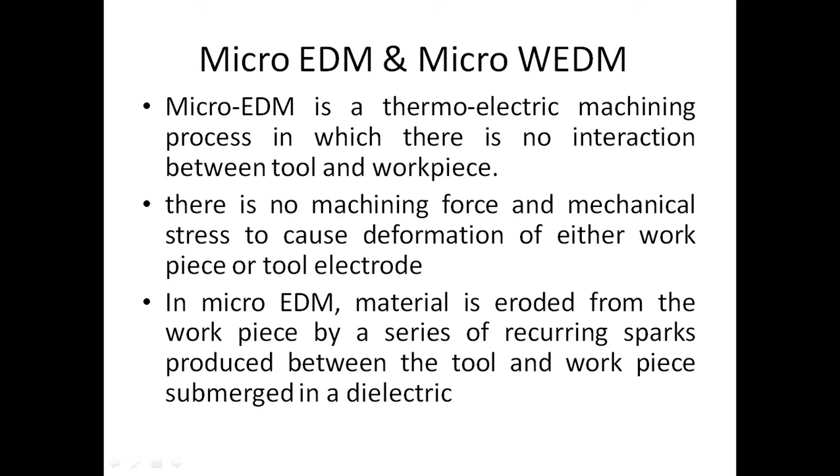It can machine any electrically conductive material regardless of its hardness and strength. Due to lower voltage and current used for a few micro or nanoseconds, the material removed for each pulse duration is in the range of micrograms. Advantages of micro-EDM systems are low tooling cost, high aspect ratio, improved precision, and considerable design freedom.

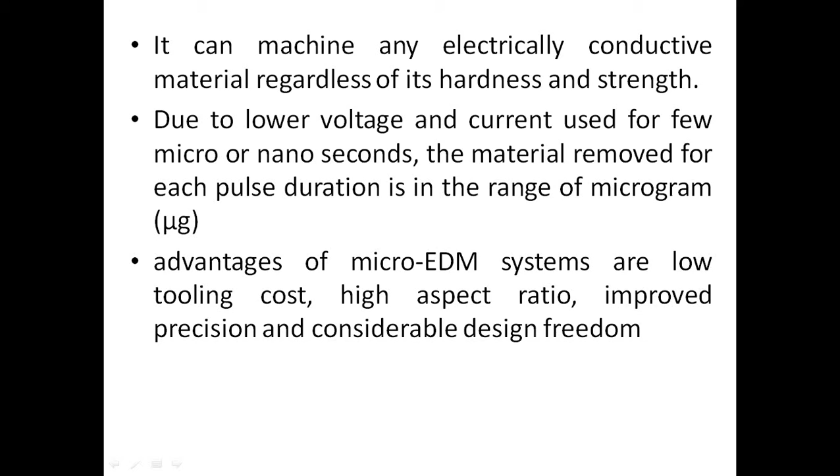Principle of material removal mechanism in micro-EDM. Parameters such as assigned and controlled inter-electrode gap, voltage, energy per pulse, and frequency of spark discharge. The high geometrical accuracy and good surface quality, roughness of about 0.1 micron, is achieved at high frequencies greater than 200 Hz and small discharge energies for each spark discharge in the range of voltage of 40 to 100 V.

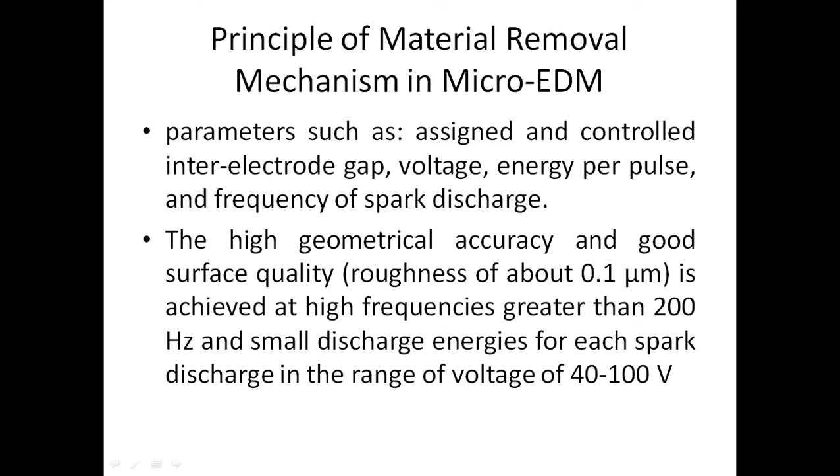The discharge energy is supplied by a pulse generator, and a servo system maintains the constant spark gap by moving the tool electrode at a suitable rate. Fresh dielectric is supplied into the spark gap by a dielectric circulation unit. The dielectric circulation unit consists of a pump, filter, and tank, and maintains the proper flushing of debris materials from the machining zone.

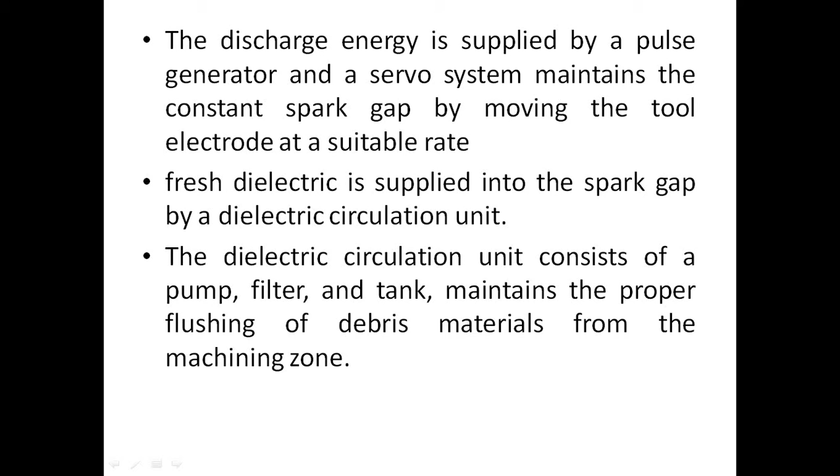Three important phases of the sparking: 1. Preparation phase for ignition, 2. Discharge phase, and 3. Interval phase between discharges.

When the suitable gap voltage is applied, an electric field with highest strength is produced between the tool electrode and workpiece. The insulating properties of the dielectric fluid eventually break down due to the presence of this electrical field, ionizing. When the resistivity of the dielectric fluid is lowest, a single spark flows through the ionized flux tube and strikes the workpiece.

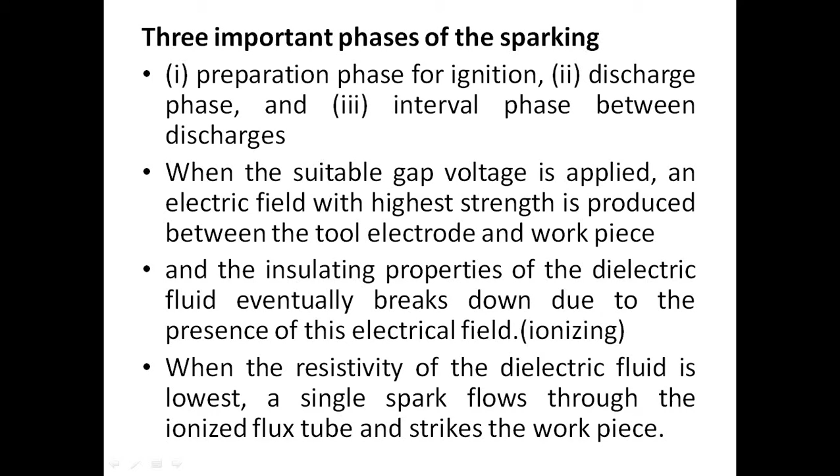At this stage, the voltage drops and high current is passed. The spark produced between the tool electrode and workpiece melts and vaporizes the workpiece material in contact and creates a single crater. The dielectric fluid, which surrounds the spark, also vaporizes along with gases such as hydrogen, carbon, and other oxides. The thermal energy of the spark and contaminants produced from the workpiece temporarily disrupts the ionization of the dielectric fluid, and thus the resistivity increases rapidly.

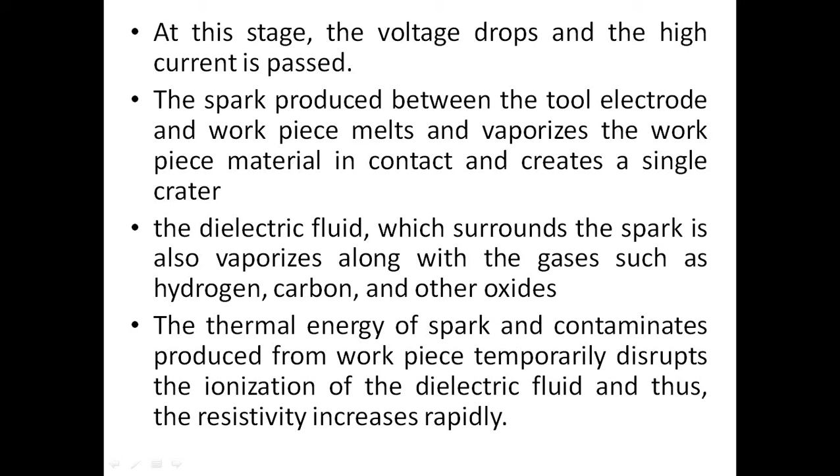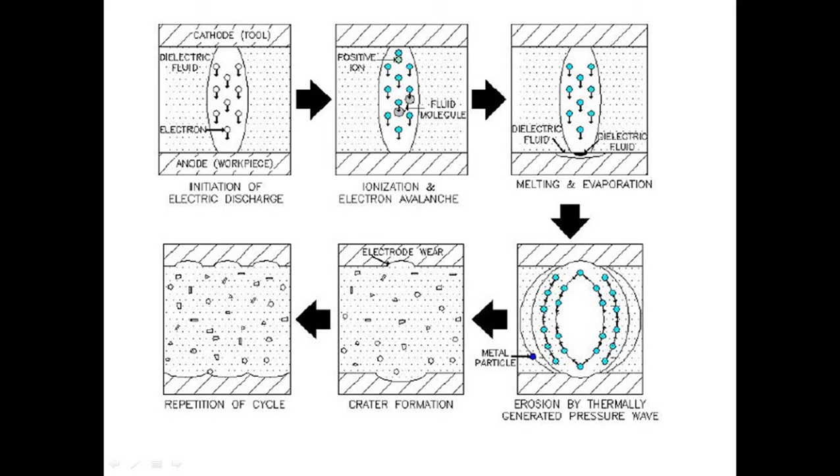Due to the increase of resistivity of the dielectric fluid, the stable spark no longer sustains, and as a result the voltage rises and the current drops. At this stage, the current is switched off using pulse interval. During the pulse off time, no spark is generated and the heat source is eliminated. The covering of vapor around the spark collapses, creating a vacuum or void, and circulates fresh dielectric fluid to flush away debris material from the crater and cool the machining zone.

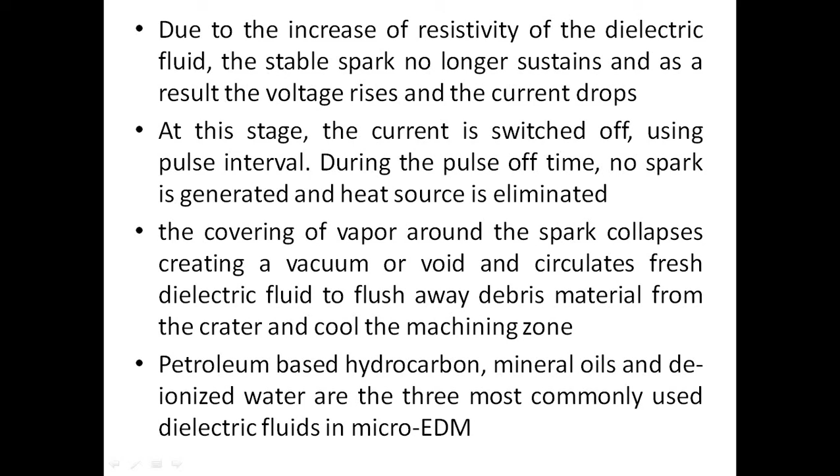Petroleum-based hydrocarbon, mineral oils, and deionized water are the three most commonly used dielectric fluids in micro-EDM. Different materials and their properties.

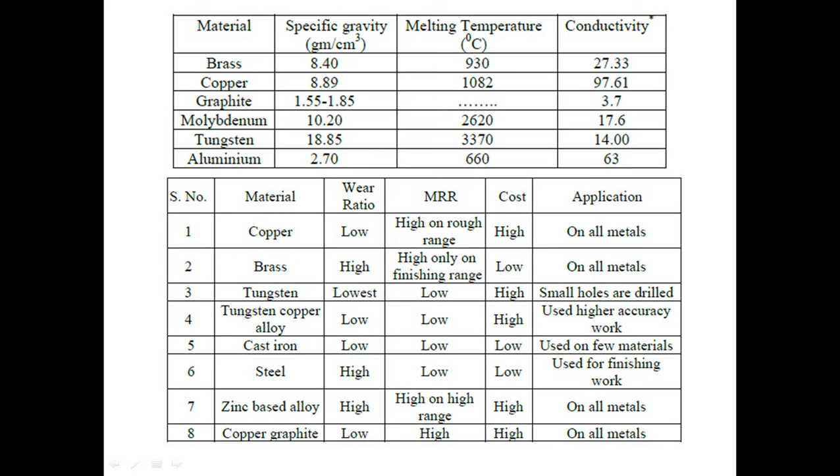Wire coil. Wire fed via wire guide coils. Control units. Collection coil. Dielectric supply: deionized water. The spark gap. Diameter of the wire. Illustration of wire EDM.

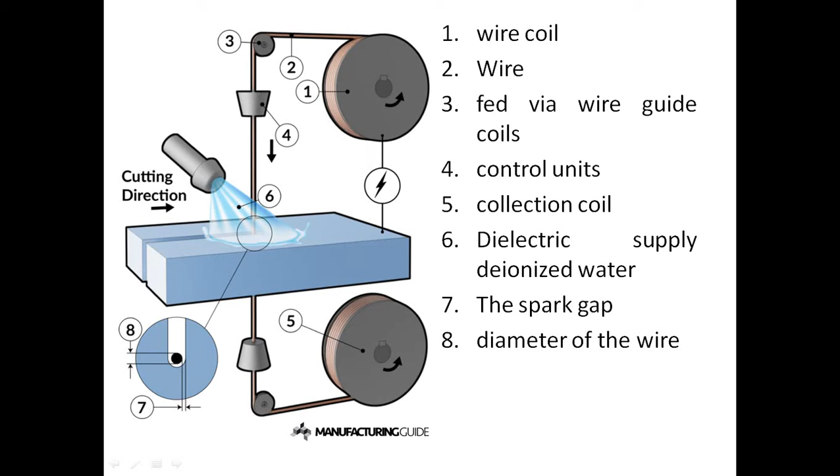WEDM uses a single string of thin metal wire to cut thick metals for precise incisions. Deionized water is used as the dielectric fluid. Automatic wire feed ensures the wire is never worn and cutting is consistent, resulting in repeatable accuracy.

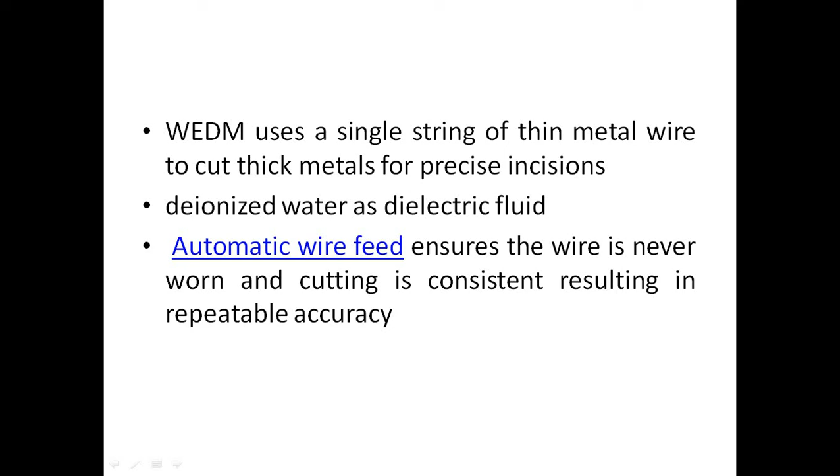Advantages and disadvantages. Advantages: can process all conductive materials. High finish on the cut surface. Small cut gap means low removal volume. Handles tight internal radii. Very high utilization, high degree of automation.

Touchless processing without cutting forces. Handles processing hard and brittle materials. Stable process. Can process heat-resistant materials. Quiet manufacturing method. Parallel cuts. Requires blasting, often only as a final operation.

Disadvantages: micro cracks can occur in the cut surface. Larger details cannot be machined as thick workpieces slow the cutting process. Non-metallic coating and laminating is difficult to spark. Slow method. Risk of corrosion due to electrolyte. The cut will be extra sensitive to corrosion.

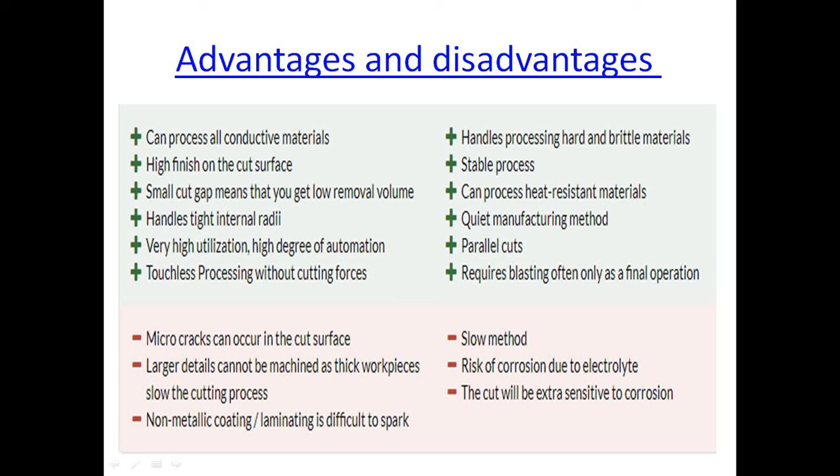Advantages of EDM. Any material that is electrically conductive can be cut using the EDM process. Hardened work pieces can be machined, eliminating the deformation caused by heat treatment. X, Y, and Z axis movements allow for the programming of complex profiles using simple electrodes. Complex die sections and molds can be produced accurately, faster, and at lower costs.

The EDM process is burr-free. Thin fragile sections such as webs or fins can be easily machined without deforming the part.

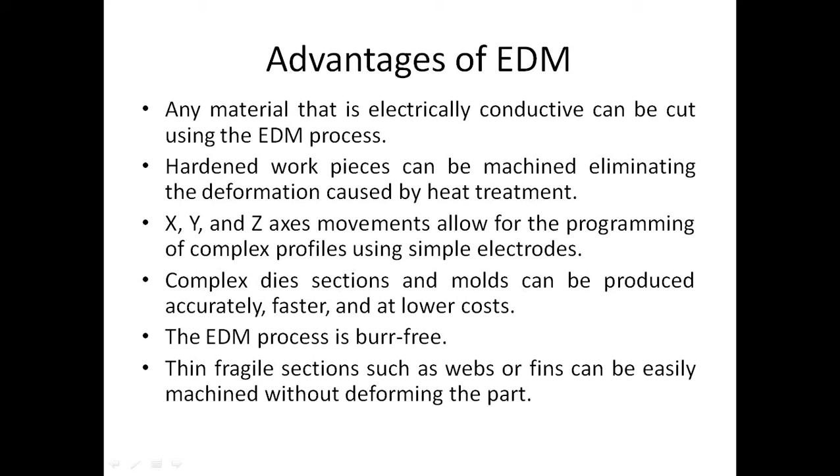Disadvantages of EDM. The slow rate of material removal. Potential fire hazard associated with use of combustible oil-based dielectrics. The additional time and cost used for creating electrode shapes. Reproducing sharp corners on the workpiece is difficult due to electrode wear.

Specific power consumption is very high. Overcut is formed. Excessive tool wear occurs during machining. Electrically non-conductive materials can be machined only with specific setup of the process.

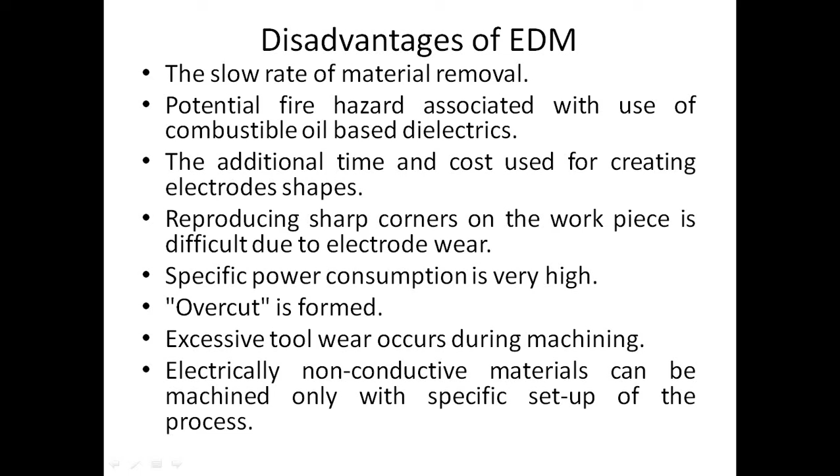Applications. Die making. Dies are tools used to cut or shape materials into a solid product. Mold making. Micro-nano systems manufacturing. Production of micro-milling tools. Complex micro-drilling tools. Micro-molds for MEMS systems. Machining of microfluidic channels. Injection molds, and stamping dies.

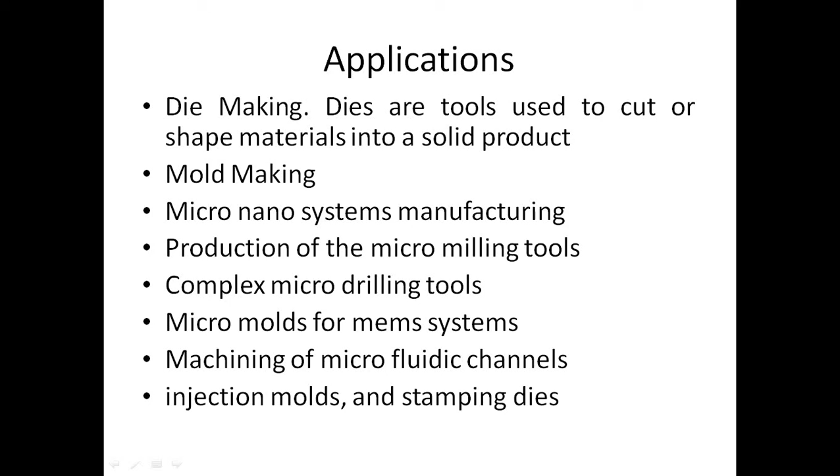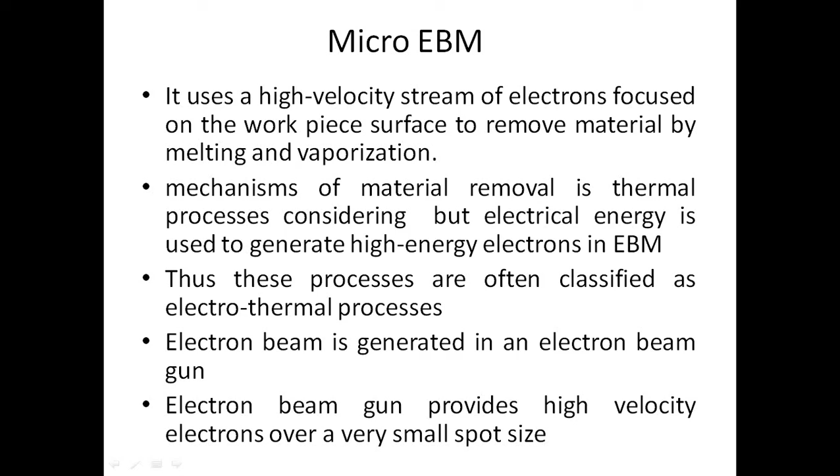Electron beam machining is required to be carried out in vacuum. Otherwise the electrons would interact with the air molecules, thus they would lose their energy and cutting ability.

The high-energy focused electron beam is made to impinge on the workpiece with a spot size of 10 to 100 micrometers. The kinetic energy of the high-velocity electrons is converted to heat energy as the electrons strike the work material. Due to high power density, instant melting and vaporization starts and the melt vaporization front gradually progresses.

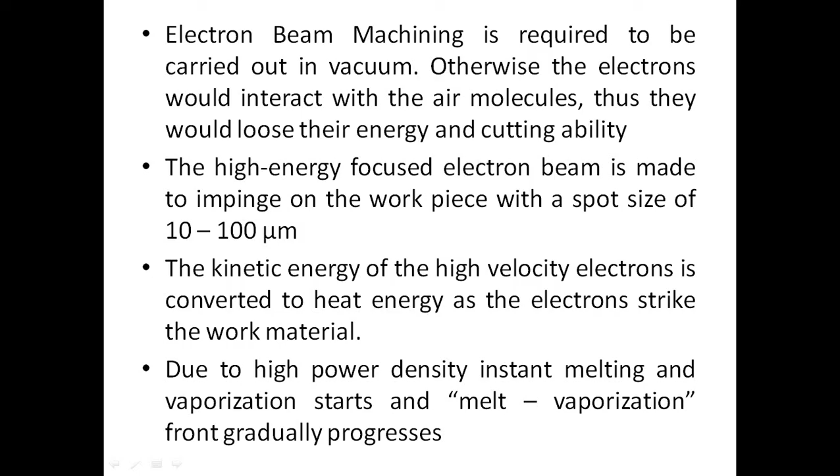Mechanism of material removal in electron beam machining: localized heating by focused electron beam, gradual formation of hole, penetration till the auxiliary support, and removal due to high vapor pressure.

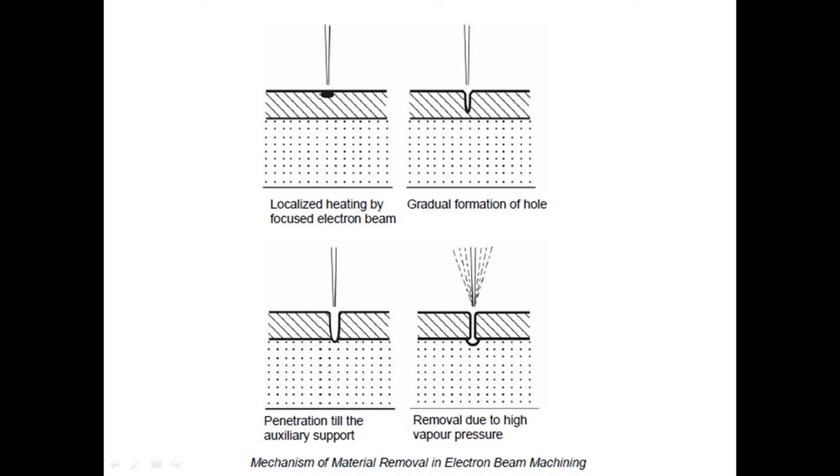Finally, the molten material, if any at the top of the front, is expelled from the cutting zone by the high vapor pressure at the lower part.

The gun in EBM is used in pulsed mode. Holes can be drilled in thin sheets using a single pulse. For thicker plates, multiple pulses would be required. To minimize the thermal diffusion problem, it is recommended to pulse the beam or scan it rapidly across the surface to be machined.

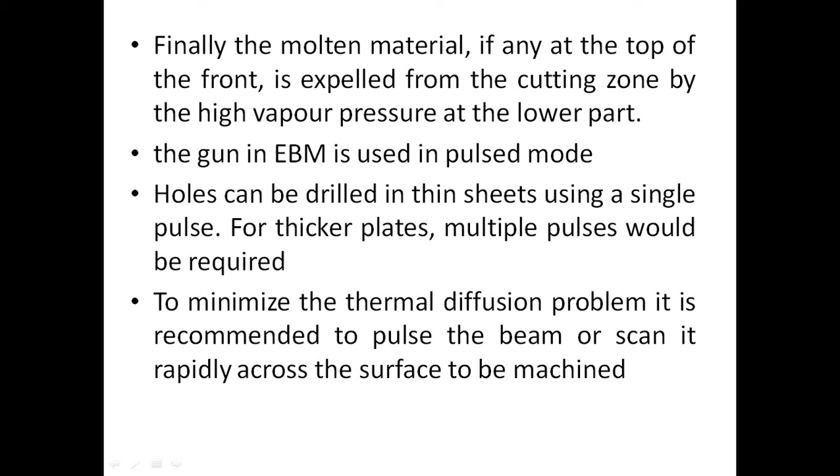Arrangement of electron beam machining machine.

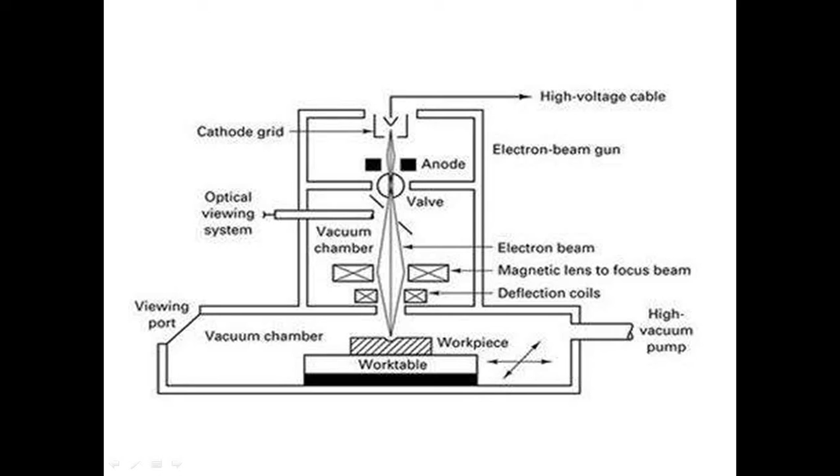The process parameters are: removal rate, surface quality, accuracy, EBM pulse time, power density, emission current, and working material.

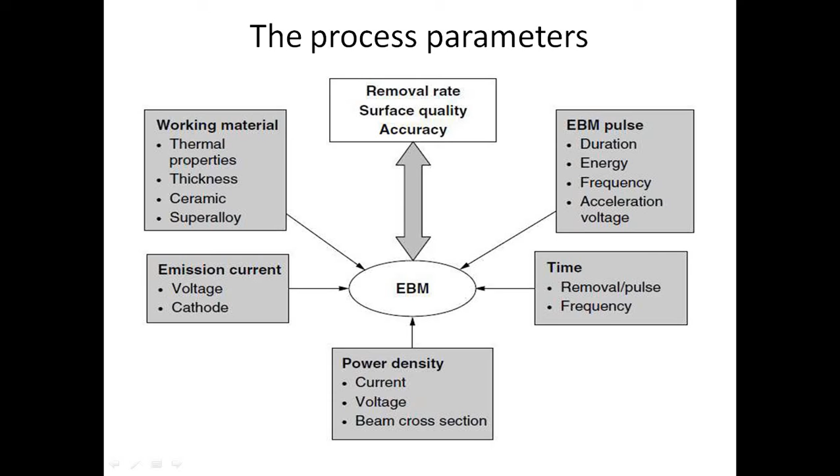Advantages. EBM provides very high drilling rates when small holes with large aspect ratio are to be drilled. Moreover, it can machine almost any material irrespective of their mechanical properties. As it applies no mechanical cutting force, work holding and fixturing cost is very low.

Fragile and brittle materials can also be processed. The heat affected zone in EBM is rather small due to shorter pulses. EBM can provide holes of any shape by combining beam deflection using electromagnetic coils and the CNC table with high accuracy.

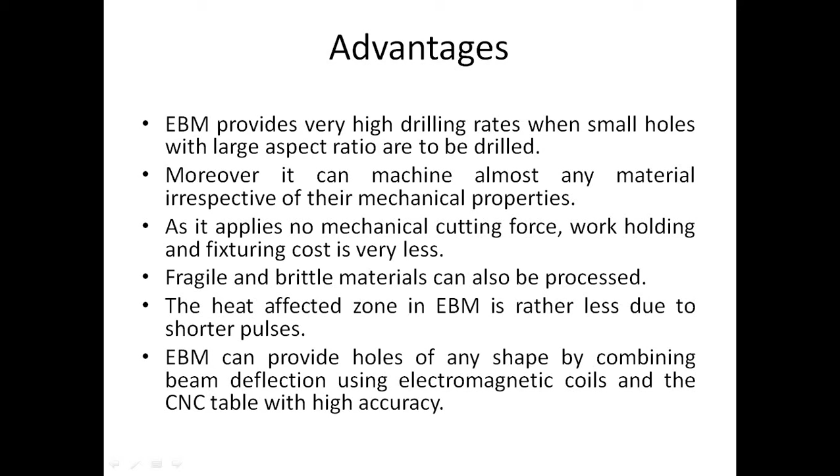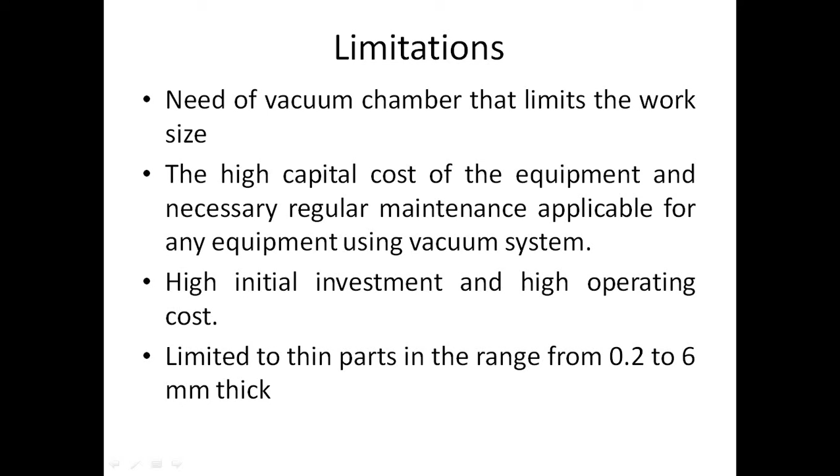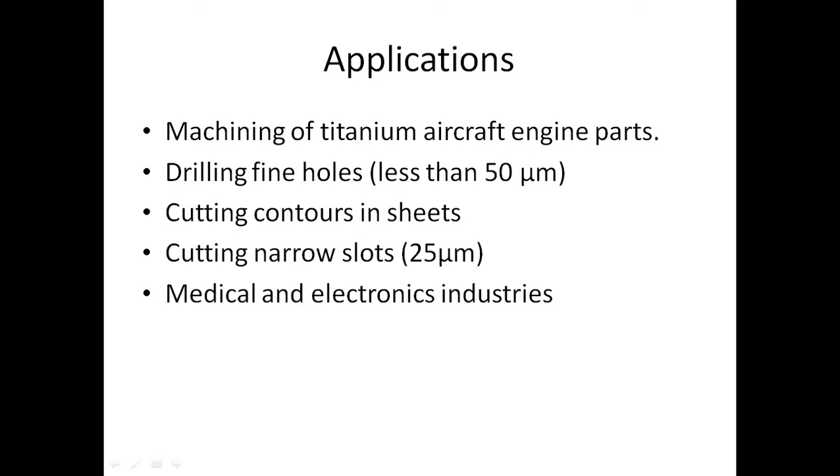Classification of non-traditional machining processes. This classification is carried out depending on the nature of energy used for material removal. They are: mechanical, thermoelectric, chemical, and electrochemical.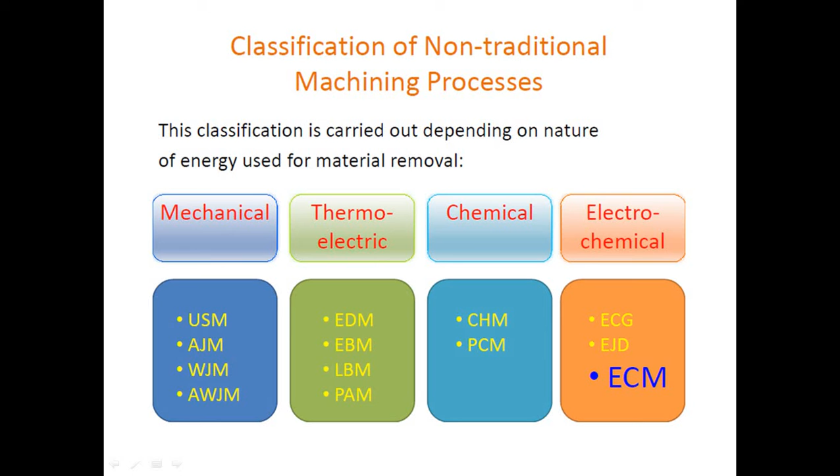Micro-ECM is a non-conventional machining system in which metal is removed by an electrochemical process. It is characterized as reverse electroplating, meaning it removes metal instead of adding it. It is normally used for mass production and for hard materials that are difficult to machine using conventional processes. Both external and internal geometries can be machined.

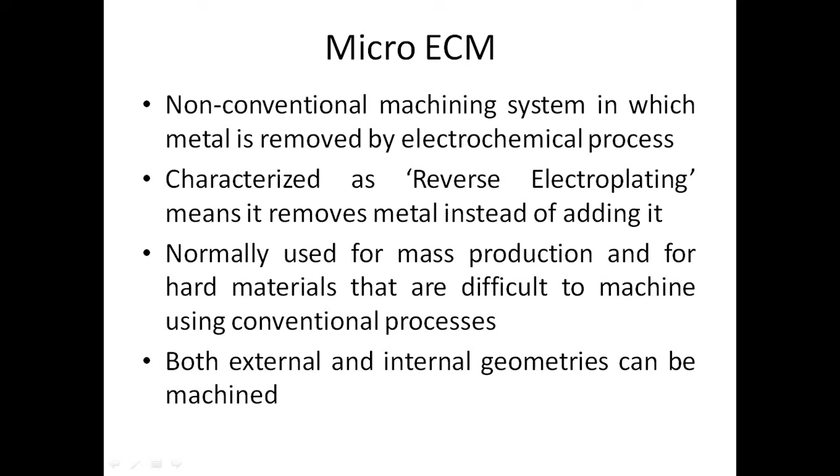Faraday's law of electrolysis: the weight of the substance produced during the electrolysis process is directly proportional to the current which passes, the length of time of the process, and the equivalent weight of the material.

Dissimilar metals are in contact with an electrolyte, and anode loses metal to cathode. Comparing ECM vs ECMM: micromachining improves resolution of anodic dissolution from millimeters to micrometers, applying pulses in nanoseconds instead of direct currents.

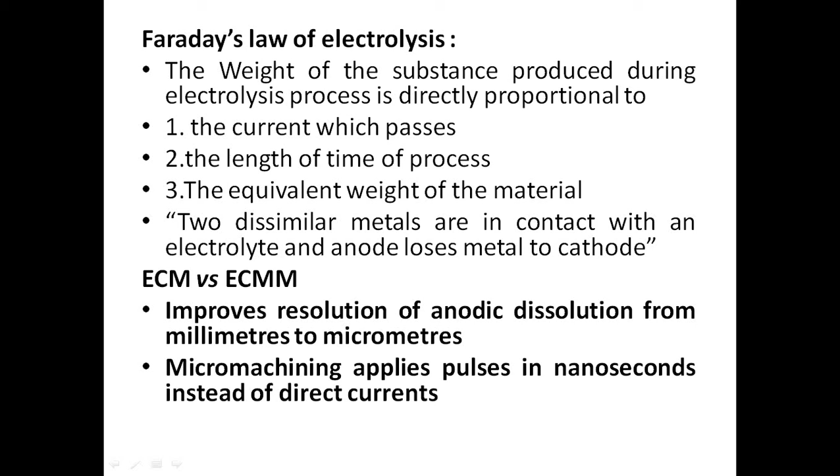The schematic figure illustrates the principle of electrochemical machining. The anode is the workpiece, the tool is the cathode, and an electrically conductive fluid is used as the electrolyte.

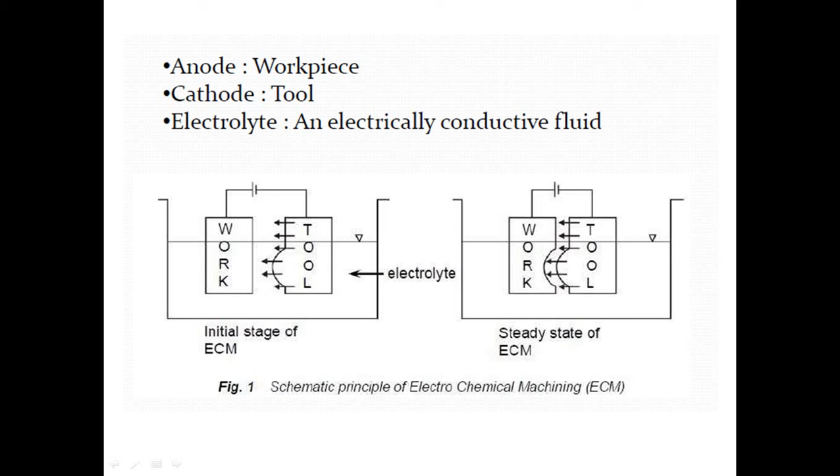The main functions of an electrolyte in ECM are: it carries the current between the tool and workpiece, it removes the products of machining and other insoluble products from the cutting region, and it dissipates heat produced in the operation.

The essential characteristics of an electrolyte include good electrical conductivity, non-toxicity and chemical stability, non-corrosive property, low viscosity, and high specific heat.

High velocity flow over the electrode surface is one of the key factors of ECM. It is necessary to prevent crowding of hydrogen gas and debris of machining.

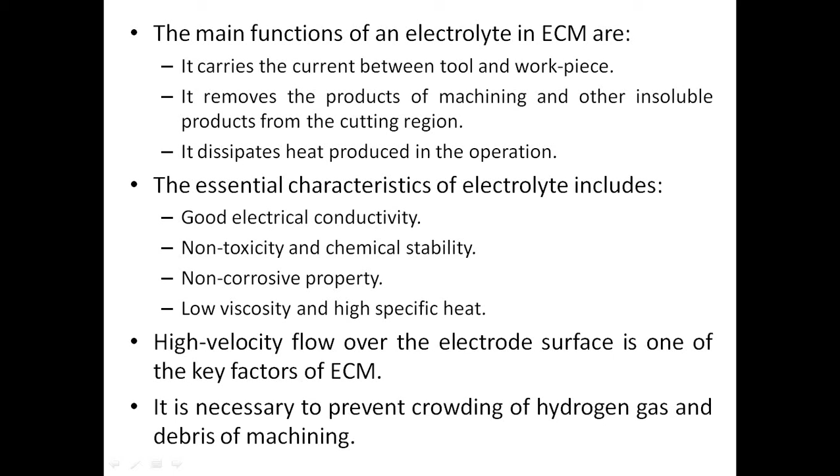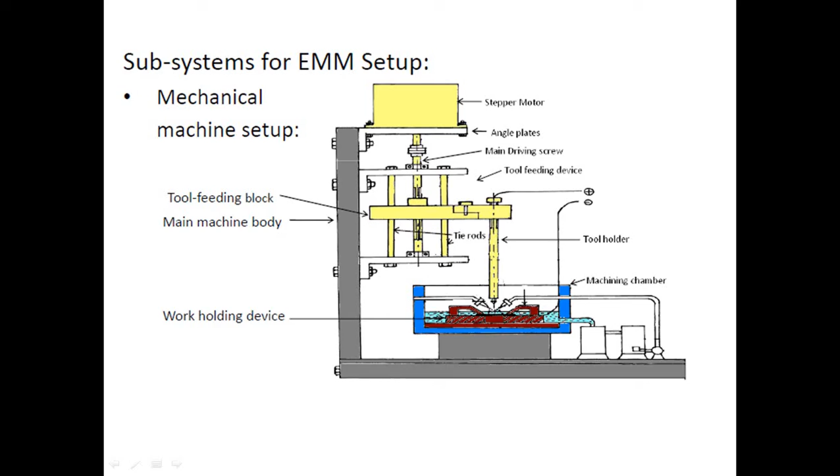Electrical power and control system of machining. Working parameters of the machine.

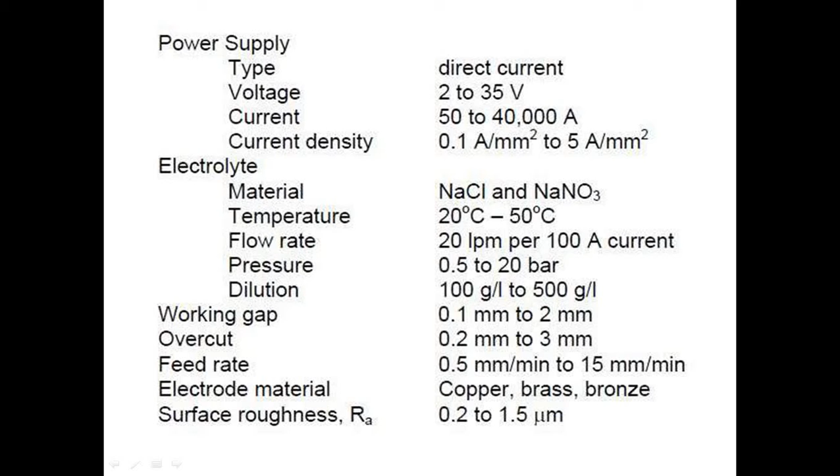Main subsystems: power supply, electrolyte, tool, the control system, the machine.

MRR depends on anodic reaction and current efficiency, mass transport effects, current distribution, and shape evolution.

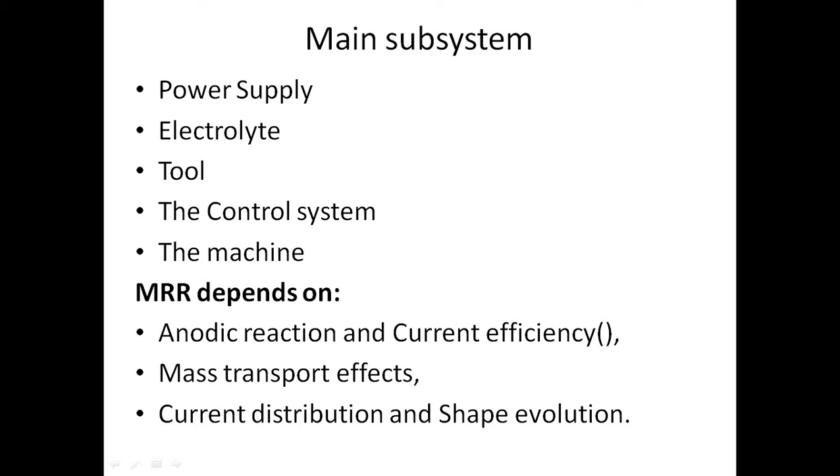Influence of various process characteristics: nature of power supply and machining pulse - DC supply and pulse DC supply.

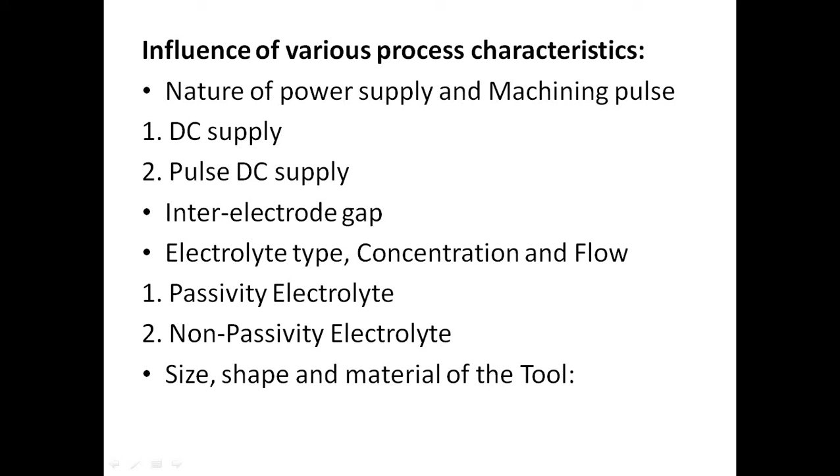Inter-electrode gap, electrolyte type, concentration and flow - passivity electrolyte and non-passivity electrolyte, and size, shape, and material of the tool.

Applications: nozzle plate for inkjet printer head, production of high accuracy holes, and 3D micromachining.

Microelectrochemical milling, wire electrochemical machining, solid electrochemical machining, oxide film laser lithography (OFLL), micro and nanometer scaled surface structuring, and laser electrochemical micromachining (LECMM).

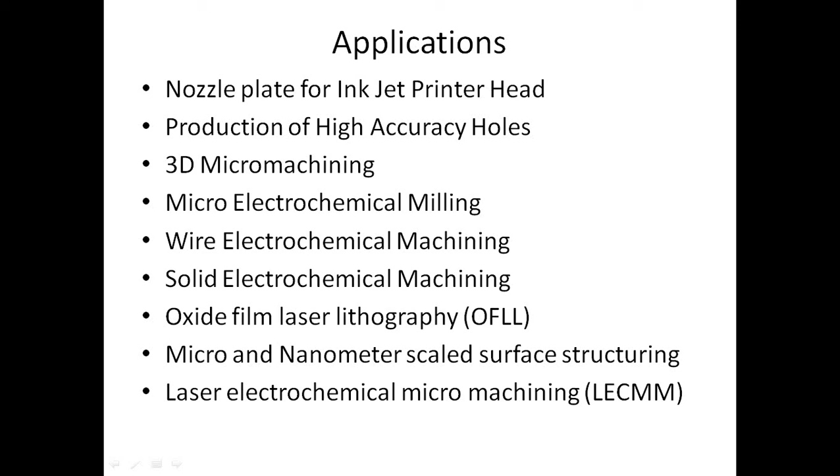Advantages: ECM is well suited for the machining of complex two-dimensional shapes. Delicate parts may be made, difficult to machine geometries and poorly machinable materials may be processed, with little or no tool wear.

Disadvantages: initial tooling can be time-consuming and costly, there are environmentally harmful byproducts, complicated tool design, and large power consumption.

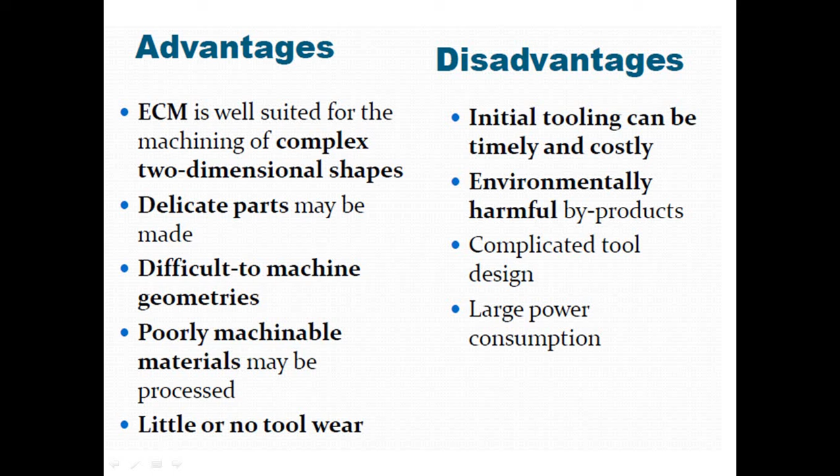Micro-LBM: laser beam machining is a thermal machining process which uses a laser beam to produce heat and remove material from the workpiece. Metal is removed by melting and vaporizing metal particles. It is mostly used in cutting and drilling operations, on both metallic and non-metallic workpieces.

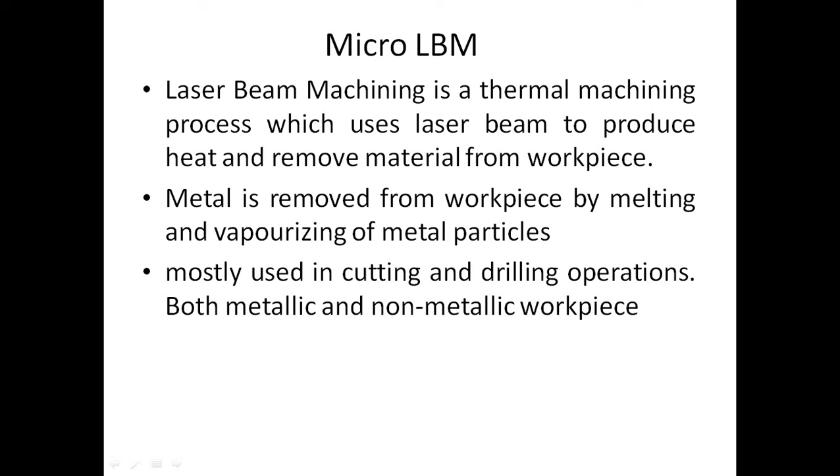Working principle: electrons of an atom are provided an external energy source, absorb energy, and get into an excited state. Electrons jump from their original energy level to a higher energy level. This is not a stable condition for the atom, so the electron emits the absorbed energy in the form of photons of light and comes back to its original state.

Spontaneous emission: the energy emitted by the atom will have the same frequency and wavelength as that of the stimulating source.

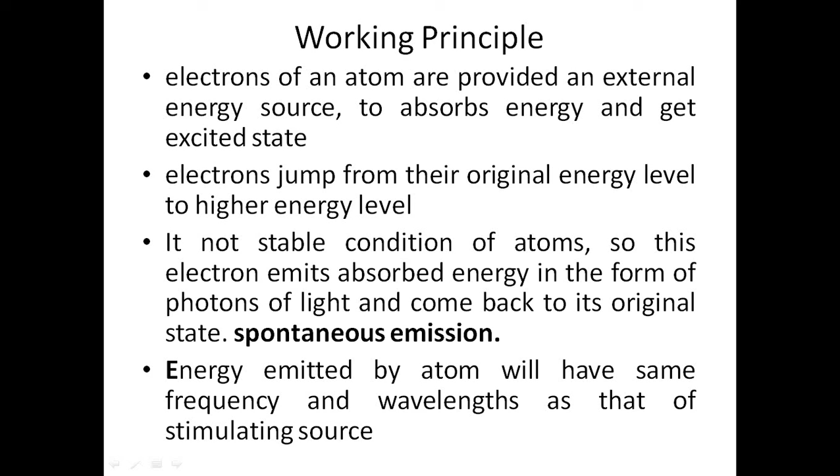The laser beam is focused onto the workpiece and can be moved relative to it. Optical energy is converted into heat energy upon impact, and temperatures generated can be high enough to melt and/or vaporize any material. Upon absorption of the laser energy, there is a rapid rise in temperature leading once again to melting, vaporization, and material removal.

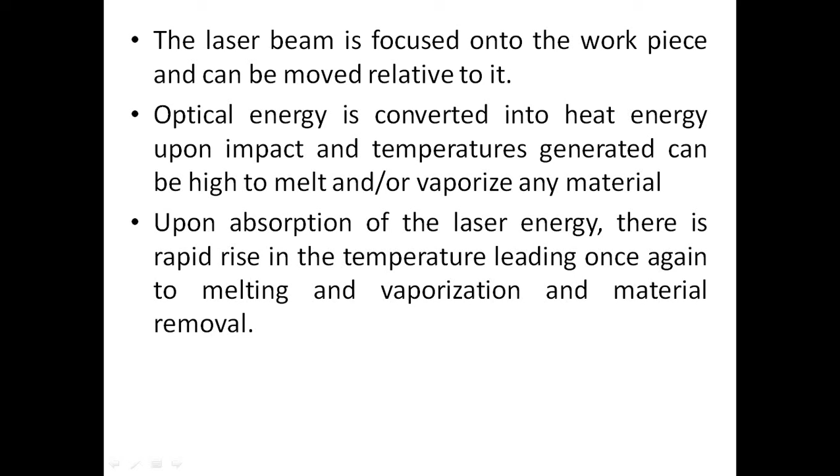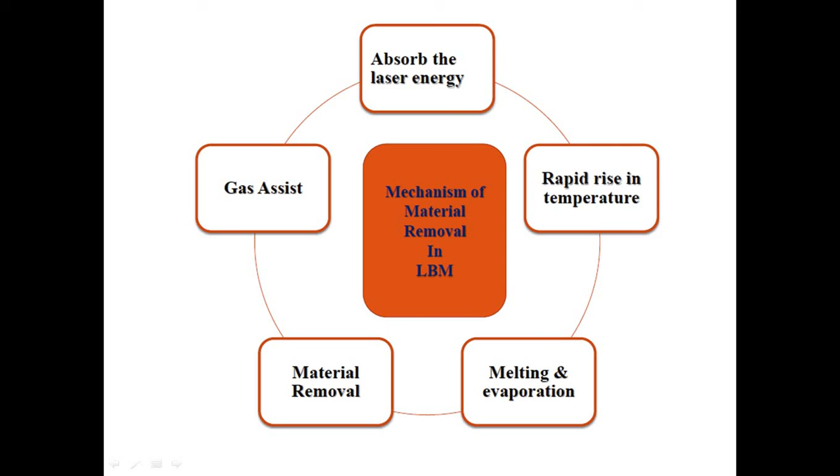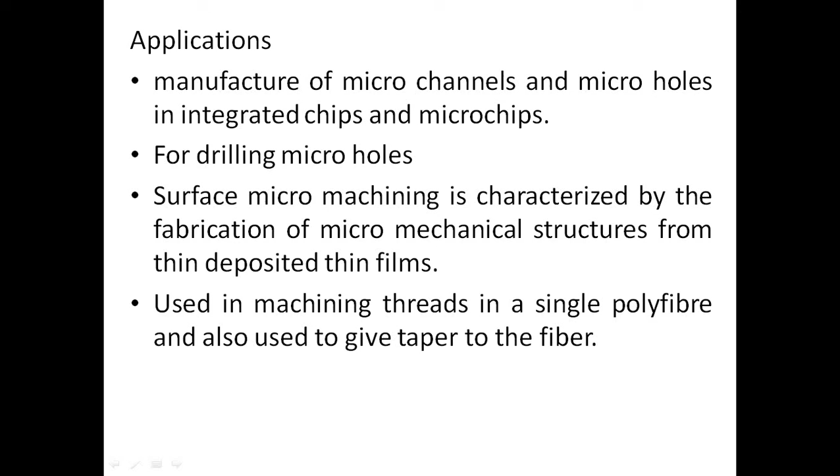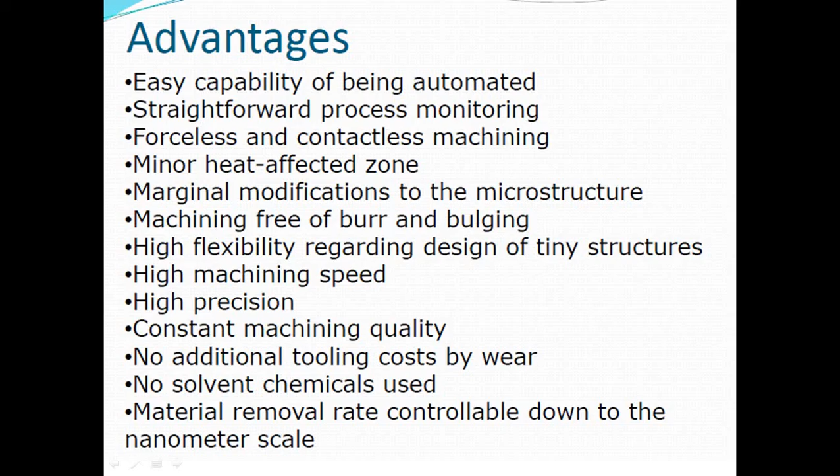Disadvantages: the equipment required for micro machining is very costly compared to other cutting processes. It needs highly skilled persons to operate micro machining systems. There are material limitations, including crystalline and reflective materials, and reflected laser light can present a safety hazard.